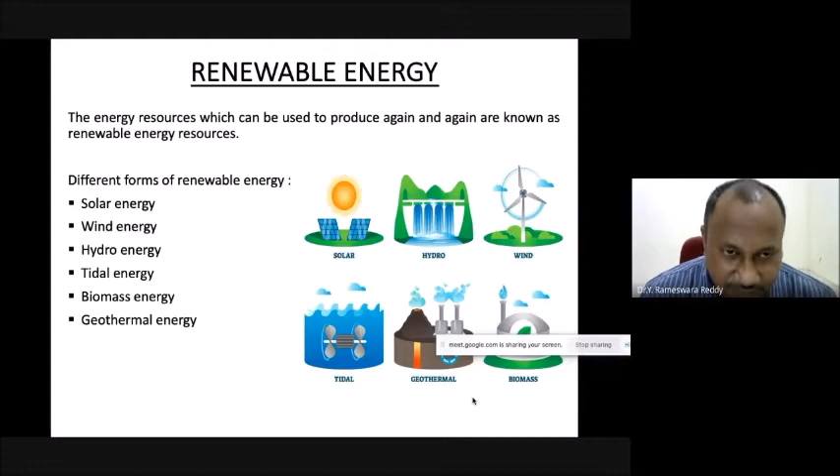Is my presentation visible? No sir. Okay, is the screen coming? It's coming, sir. Okay, now it is visible sir. Okay Rameswara Reddy garu, sorry for the disturbance, I am not conversant with this new system, that's why it got delayed. Fine sir, continue please sir.

Renewable energy sources for industrial applications is my topic for today's presentation. I am Dr. N. Kishore Nath, Scientist G, Project Director with the Advanced Systems Laboratory, DRDO, Hyderabad.

We have done research work on renewable energy for windmill blades made of composites. We developed this around 20 years back through a project called windmill turbine blade development, sponsored by the Ministry of Non-Conventional Energy Sources. With that, I have some association with renewable energy. I will start my presentation.

Energy resources which can be used to produce energy again and again are known as renewable energy sources. Different forms of renewable energy include solar energy, wind energy, hydro energy, tidal energy, biomass energy, and geothermal energy.

Solar energy is widely used nowadays because it is plentifully available. There is no limit for solar energy; how much you can tap depends only on your usage. It is even used for aircraft. We are trying to use solar energy, and already people are flying with solar panels on aircraft, going from one place to another without any issues.

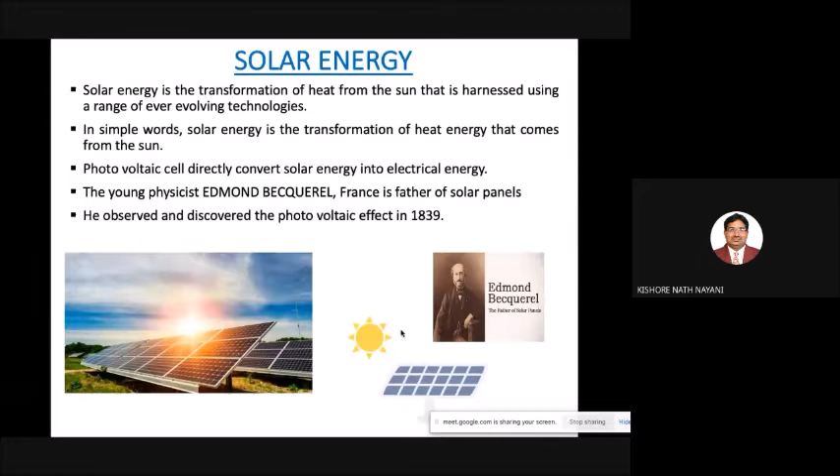Solar energy is the transformation of heat from the sun that is harnessed using a range of ever-evolving technologies. In simple words, solar energy is the transformation of heat energy from the sun into electrical energy. The photovoltaic cell directly converts solar energy into electrical energy and is the main element in this conversion. Edmond Becquerel, the father of solar panels, invented the photovoltaic effect in 1839. Solar thermal panels are used to generate heat energy.

Photovoltaic cells are made from silicon. They turn solar energy directly into electricity. This is the pictorial diagram where we can see a solar panel with silicon positive and negative layers. Once solar energy falls into the photovoltaic cell, it converts into electrical energy.

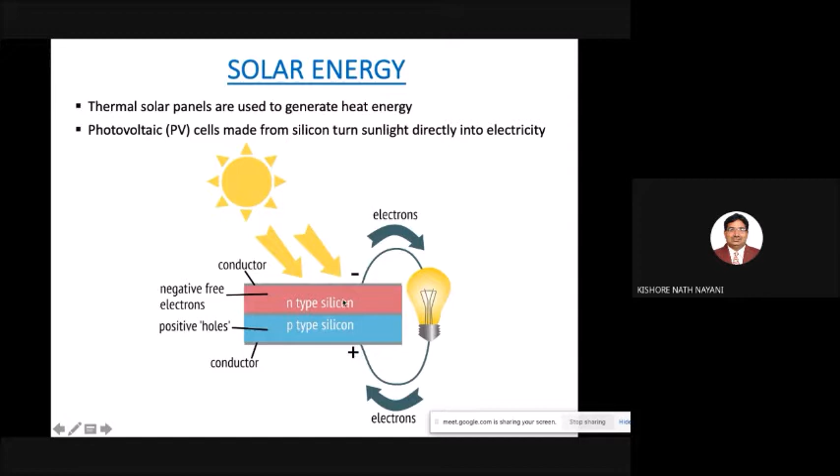Solar panel technology is advancing rapidly with greater efficiency and lower prices, resulting in a huge increase in demand. Initially, photovoltaic cells were very costly, but nowadays, because of government initiatives and more production of photovoltaic elements, the cost is coming down.

However, despite massive advancement in technology, basic solar panel construction hasn't changed much over the years. Most solar panels are still made up of a series of silicon crystalline cells sandwiched between a glass plate and a polymer plastic backsheet, supported with an aluminum frame.

Once installed, solar panels are subjected to severe conditions over the course of their life. Solar photovoltaic cells are made using silicon crystalline wafers, similar to the wafers used to make computer processors. The silicon wafers can be either polycrystalline or monocrystalline. The most efficient type is monocrystalline, manufactured using the well-known Czochralski process.

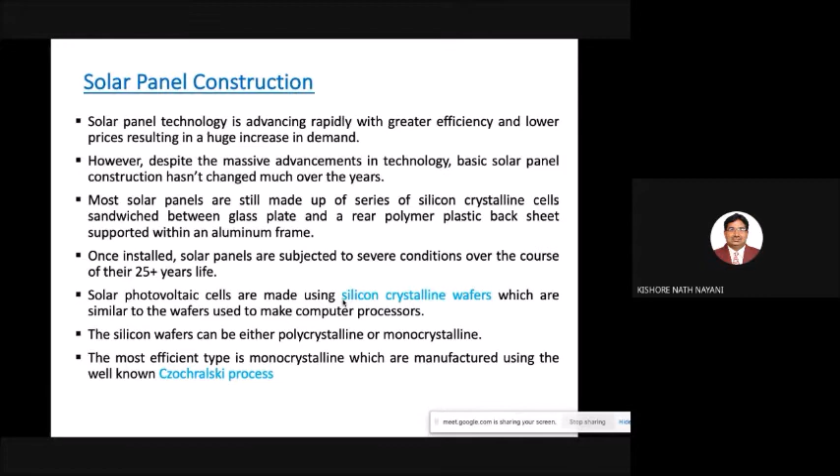This process is more energy intensive compared to polycrystalline, and therefore more expensive to produce. Monocrystalline silicon cells have the highest efficiency and highest cost. Cast mono-silicon cells have high efficiency and lower cost. Polycrystalline silicon cells have lower efficiency and lowest cost.

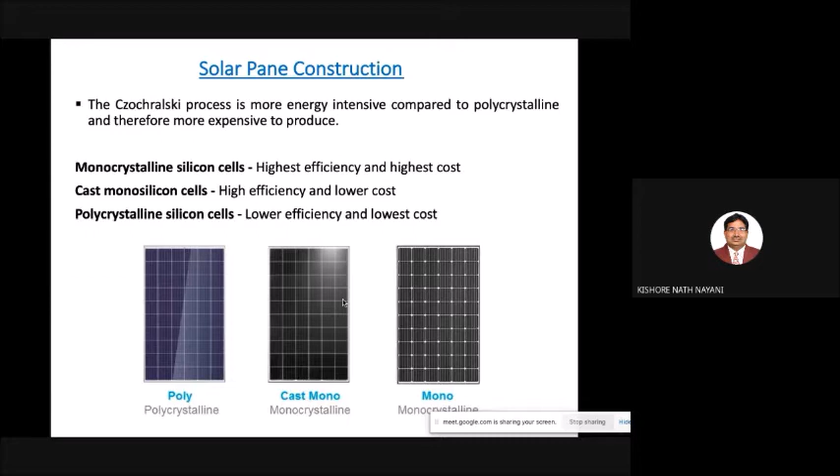For manufacturing crystalline silicon cells, silicon sand is purified in an arc furnace to create 99% pure silicon. This 99% silicon is further refined to close to 100% purity. The silicon is doped with boron or phosphorus, then melted and extracted into a crystalline ingot. The round ingot is diamond wire cut into square wafers. This is the manufacturing process for crystalline silicon cells.

The thin base wafer is coated with an ultra thin layer of either P-type or N-type silicon to form the PN junction, as shown in the figure. Anti-reflective layer and metallic fingers are added to the cell surface, and flat ribbon bus bars or thin wire bus bars are added, as shown in the figure.

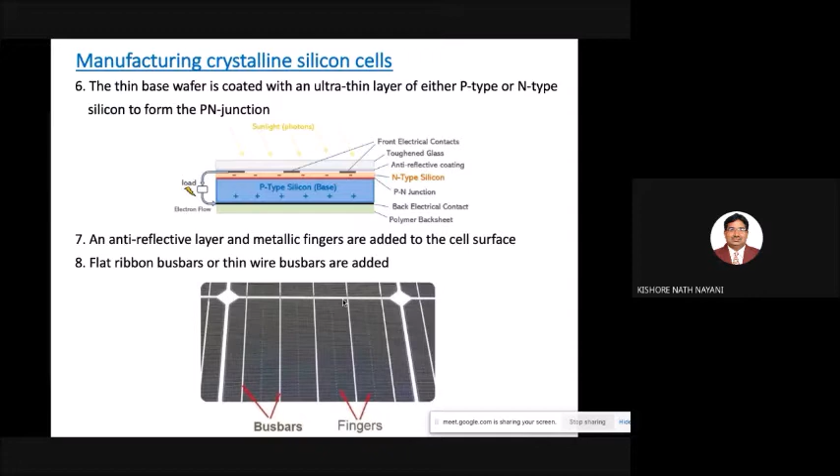In our laboratory called Advanced Research Center, near our DRDO in Hyderabad, there is a lot of research going on in order to remove water droplets or dust falling on the solar panel glass without any effort, so that the efficiency of the solar cells will increase.

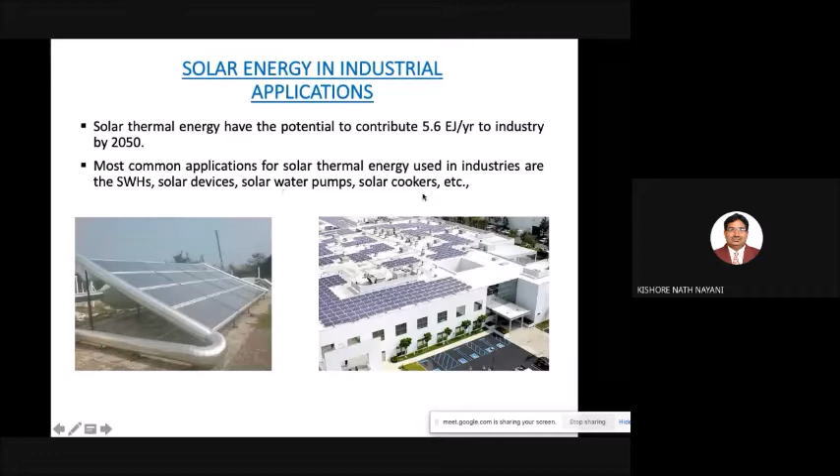Solar thermal energy has the potential to contribute 5.6 exajoules per year to industry by 2050. The most common applications of solar thermal energy used in industries are solar water heaters, solar devices or drives, solar water pumps, solar cookers, etc. I want to tell you, way back in '95 when we completed engineering, we did a project on solar water heaters.

We did that project at JNTU College of Engineering, Anantapur, under the guidance of Durga Prasad sir. I am very happy to tell you that we did some project work way back 25 years ago itself.

If you look at solar panels, most industries are using solar panels to generate their own energy, like Apple, which is a giant in computer devices. They use their own solar energy to meet their own energy requirements. Other companies like Google also use solar energy very efficiently, so that they don't need to depend on the main supply from the states or government. They generate their own energy, and give excess energy to the grid.

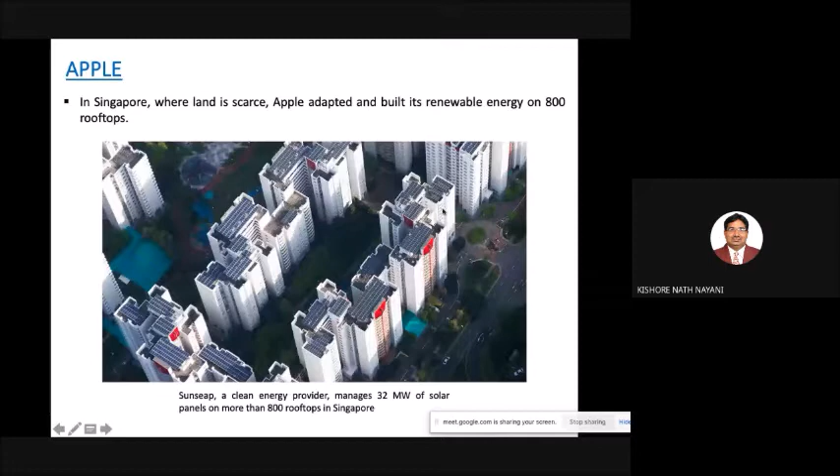Apple uses buildings in Singapore to generate solar power for themselves as well. This is one example.

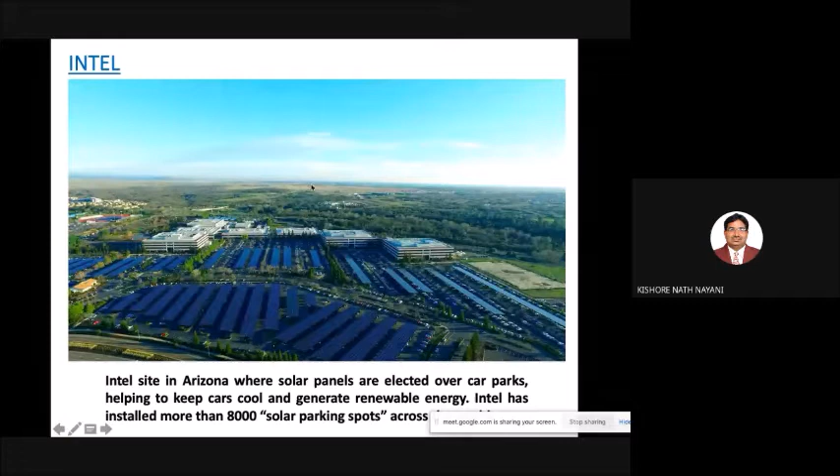In our laboratories also, we are extensively using solar energy. We have planted solar panels on our rooftop and car parking areas, and extensively use them even in our defense usage. Most of the places we are using solar energy.

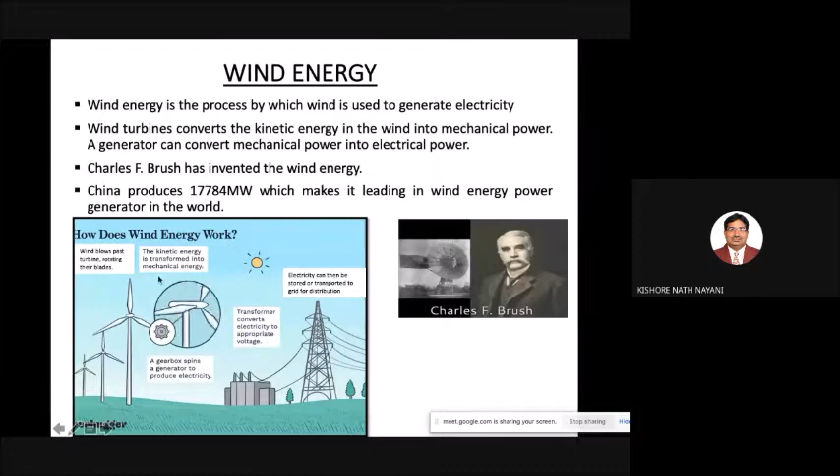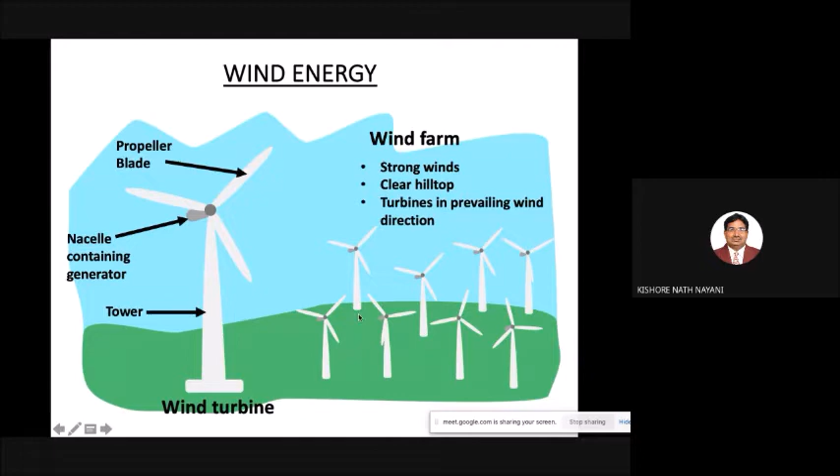The main components of the wind energy mill are the tower, the propeller blade, and the nacelle containing the generator. For a wind farm, we need strong winds, clear hilltops, and turbines in the prevailing wind direction, so wherever the wind is blowing continuously, we can establish the windmill energy.

Wind energy is a free and renewable source. There will be the same supply in future no matter how much is used. It is a source of clean, non-polluting electricity that does not emit pollutants or greenhouse gases. So there is no pollution from wind energy. It's a clean fuel source that does not pollute the air like power plants that rely on coal or natural gas. So there is no pollution and no consumption of resources from nature. These are the two advantages of windmill energy.

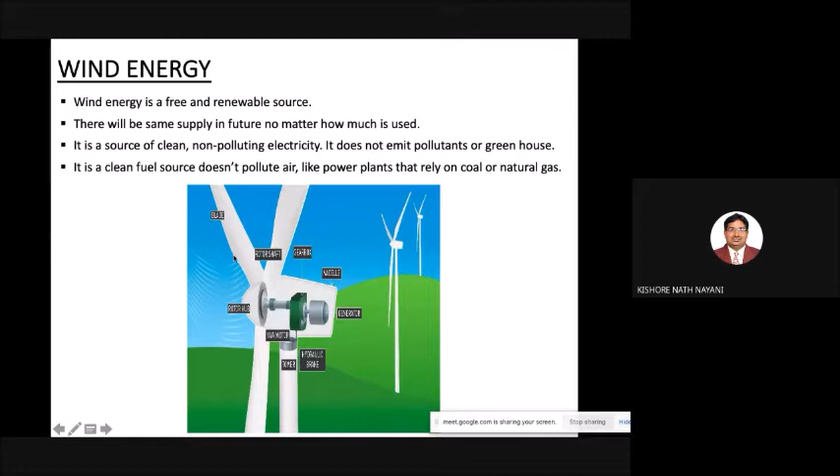Looking at the construction of the blade, since windmill blades are very lengthy and occupy a large diameter, naturally the blade weight has to be controlled. The blade weight has to be as minimum as possible, and it should be aerodynamically shaped. That's why it is made of composite materials.

The cross section of the blade consists essentially of the outer shell, with two outer shells, and in between, for strengthening purposes, we have internal structural support, along with a trailing edge and leading edge. These internal members are also called spars. This is the main construction of the blade.

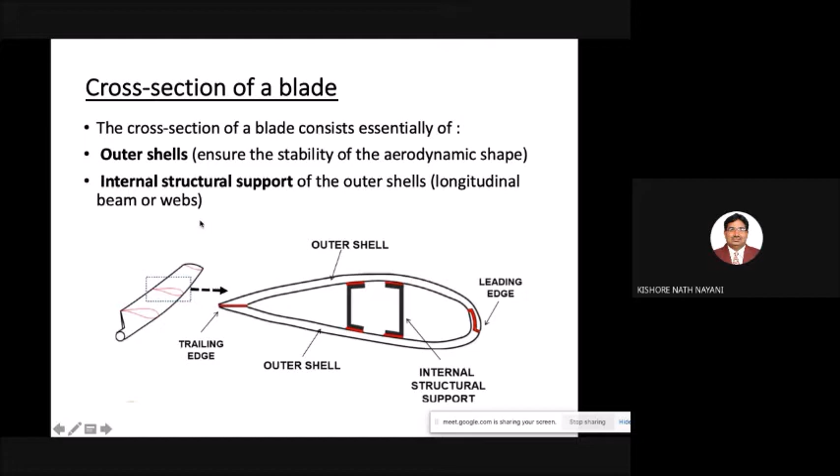There is one more way of making the blade. In order to avoid weight, we can make sandwich panels, with an outer face sheet and inner face sheet, and foam in between, so that we can reduce the weight and increase the stiffness for blade manufacturing purposes.

The main loads are on the blades, which give us flap-wise load and edge-wise load. The aerodynamic shape is like an aerofoil shape. We have to design the blade so that when the wind flows, the blade rotates.

The main loads on the blade are generated by wind and by gravity. Wind loads mainly induce both flapwise and edgewise bending. Gravity loads mainly induce edgewise bending when the blade is horizontal. The rotation of the blade causes alternating edgewise bending, and thus fatigue of the material.

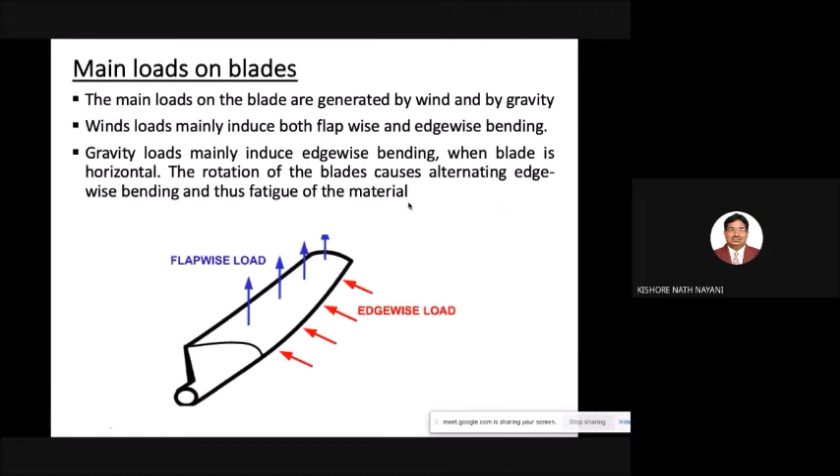The blade will be continuously rotating, that's why fatigue load is also very important to consider in the design. So the key structural design requirements: it must resist the extreme loads and fatigue loads, must be stiff to prevent collision with the tower, and must be as light as possible. That's why we make windmill blades with composite material like e-glass fiber and polyester resins.

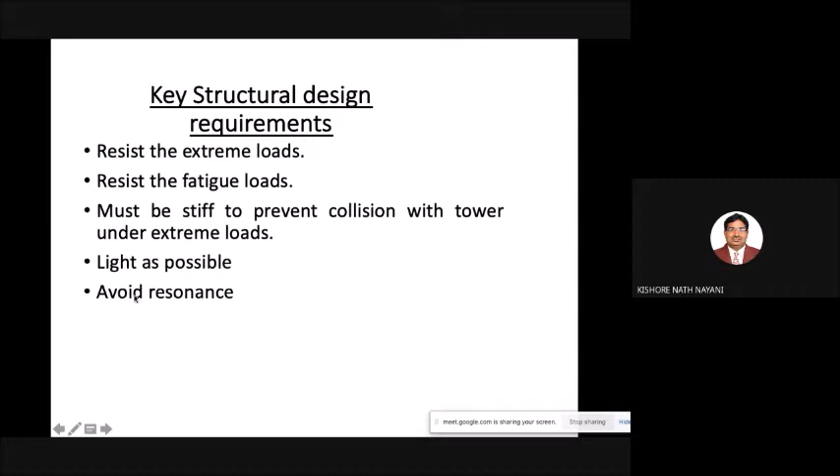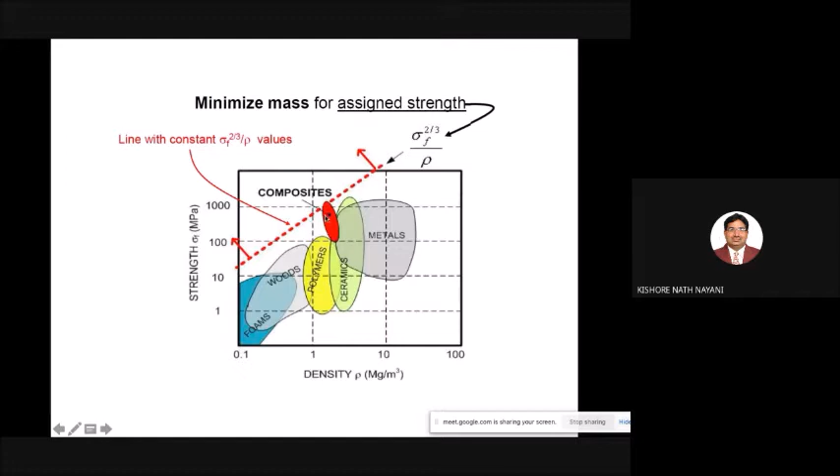Then it avoids resonance, which is also one of the important parameters we have to consider during the design. If you see the graph, composites have more strength and less density, so that makes them a candidate material for manufacture of the blades. In terms of stiffness also, composites will meet the requirement.

If you see the construction of the material, there is a top skin and bottom skin made of composites with different layers, like 0 degree, 90 degree, plus minus 45 degree, depending upon the design. We have to choose the layer lamina sequence.

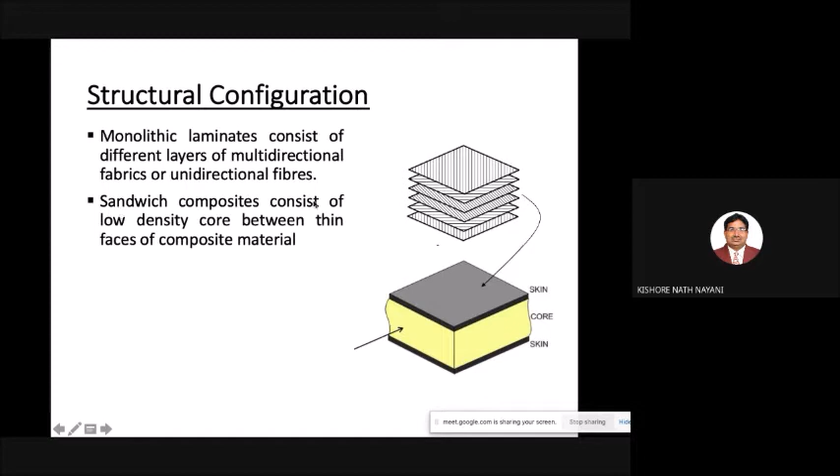Between the top skin and bottom skin we use a core, like a honeycomb core or a foam core. Monolithic laminates consist of different layers of multi-directional or unidirectional fabric, and a sandwich composite consists of a low density core between thin faces of composite material.

If you use sandwich composites, when load is applied, the outer fiber takes the tension and the inner fiber takes the compression load. If the main thickness of the skin is T, the foam should be 2T, so the total thickness becomes 4T. The insertion of core increases the thickness of the structure and thus the flexural stiffness and strength without increasing its weight. This is how sandwich construction is made for manufacturing the blade.

In the manufacturing process of the blade, there are various techniques, but we used the wet hand lay-up technique for realization of a 20-meter long blade with 1.5-meter width in our laboratory long back. Other techniques include vacuum infusion, pre-preg, resin infusion, wet hand lay-up, filament winding, and blade infusion.

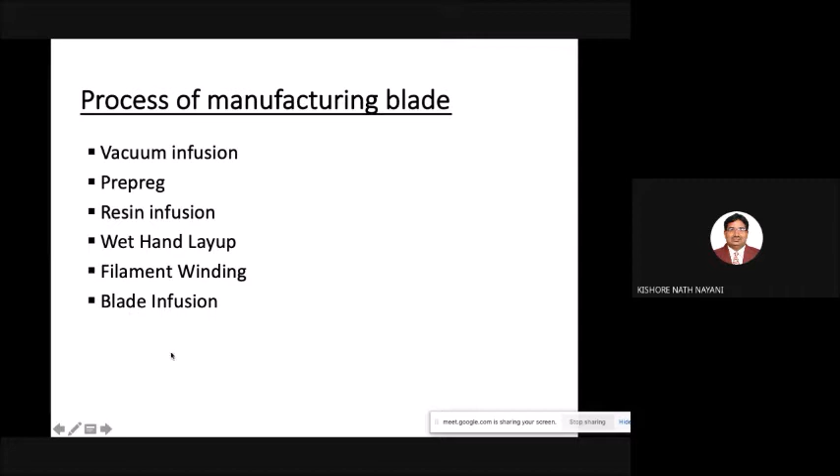Nowadays vacuum infusion technique is mostly used by industries. In pre-preg technology, there is industrial impregnation of fiber, then forming the impregnated fiber into a complex shape. This technology gives a higher production rate. We make the pre-preg in an impregnation plant, and finally use the pre-preg for realization of the blade, as shown in this schematic diagram.

On the mold surface, we use a release film, then pre-preg, core, pre-preg, then peel ply to get a better texture, then breather and vacuum bag. It consists of fiber impregnated with resin that is not fully cured, called the B stage.

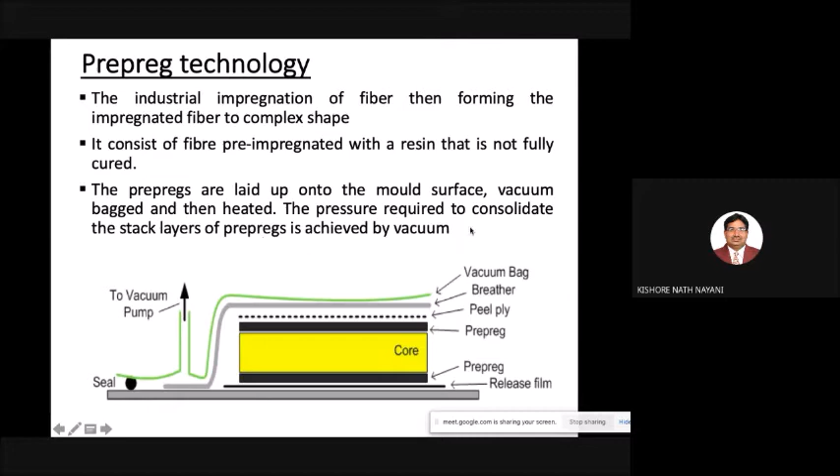This is resin infusion technology. Nowadays most industries use resin infusion technology because it takes less time to manufacture a blade - even in one day, one blade can be manufactured. Fibers are placed in a closed sealed mold and resin is injected into the mold cavity under pressure. After the resin fills all the volume between the fibers, the component is cured with heat.

First on the mold you have to apply release agent and then put the fiber, and the resin is transferred through vacuum to the entire surface of the fiber. After the entire fiber is wet, then the vacuum bagging is done and the mold is heated so that you can realize the blade.

So there are various types of resin infusion technologies and resin transfer molding techniques. You can use pressure to transfer the resin into the fabric - that is called resin injection under pressure higher than atmospheric. There is another technique called vacuum assisted resin transfer molding, which is resin injection under vacuum or pressure lower than atmospheric.

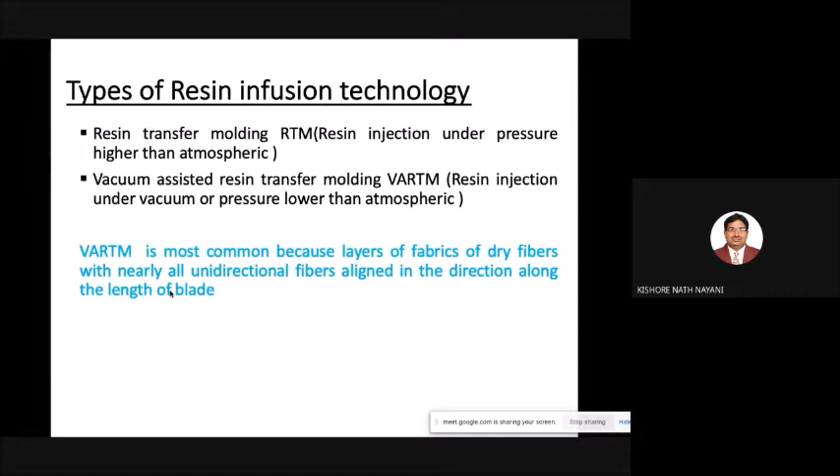VARTM is the most common technique used because layers of fabrics of dry fiber with nearly all unidirectional fibers are aligned along the length of the blade. Vacuum assisted resin transfer molding is the proven technique for realization of these blades because various materials have been developed to impregnate the fabric uniformly, and it's continuously used because it's a very fast technique - we can realize any very big blade, even one blade per day.

This is another important technique used in the initial days of development, called the wet layup technique. Dry fiber materials like mat, fabric, or unidirectional tapes are laid in various layers into the mold of the component, then impregnated with resin and cured at room temperature. Or if you use high temperature resin systems, you have to heat either in an oven or by using a heater arrangement in the tool itself to realize the blade.

This is capital intensive machinery. Once the machinery is established and the techniques are established, we can produce blades at a very faster rate, and very accurately all the fibers can be aligned so that the thicknesses can be reduced. We can make efficient blades.

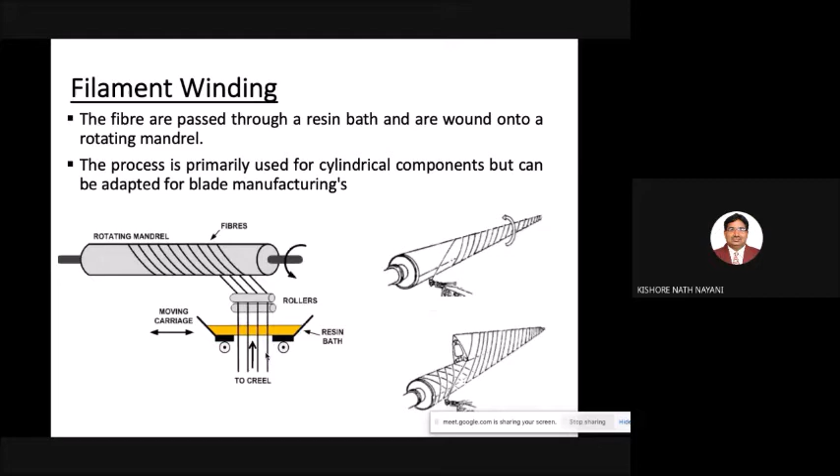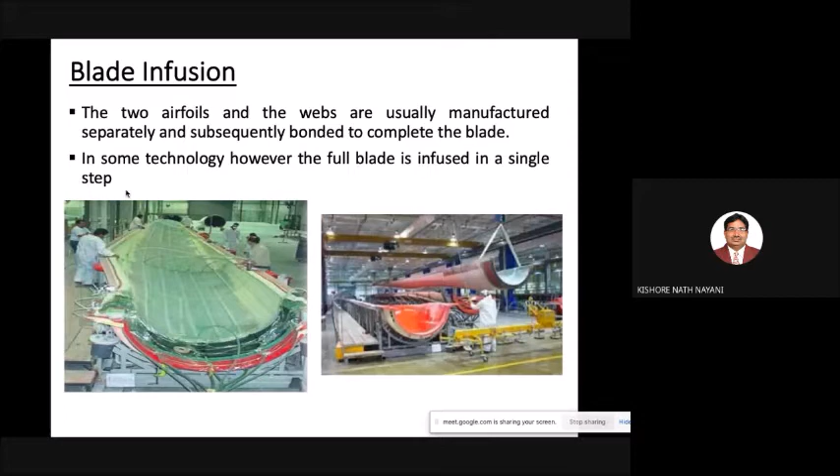In composites, there are various types of defects that can occur, and we have to avoid defects in order to make the blade without any defects. Voids and dry zones, delamination, bonding defects, foreign inclusions, fiber waviness, wrinkles - these are the common defects which come up in the manufacturing of the blade.

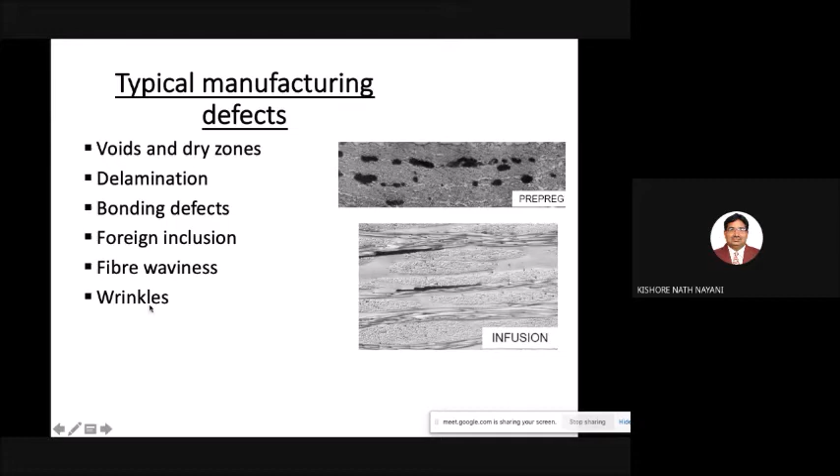There are various fibers used in the realization of these blades, called glass fiber, carbon fiber, aramid fiber, basalt fiber, then hybrid composites. In some places we can use combinations of these fibers, then natural fibers. Another important element is called the matrix, that is the resin system - we can use polyester resin, vinyl ester resin, epoxy resin.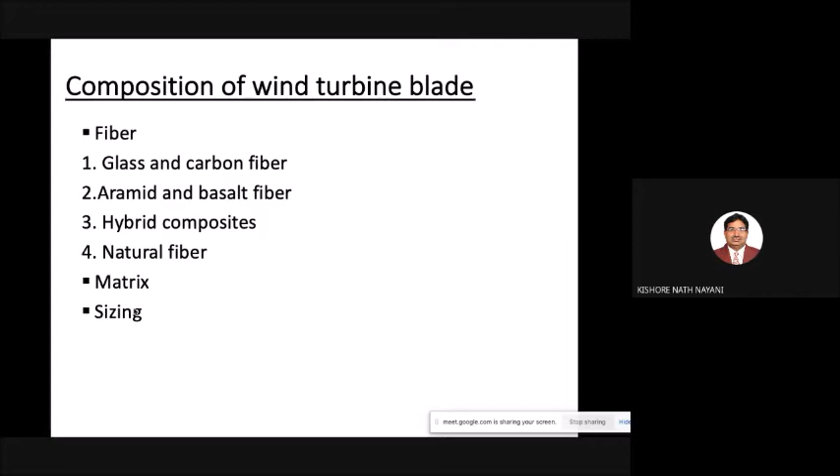Then the fabrics we are using should be sized in order to have compatibility with the resin system - like for epoxy resins, we give silane coating. For carbon fabric, other types of coatings are given in order to have a good bond between the resin and the fiber. Glass fiber is mostly used because it is readily available and has good strength, used as the main reinforcement material in composites, and with increasing volume content in fiber, stiffness, tensile strength, and compressive strength increases. Then S-glass fiber also has good strength, so it is also used in some applications.

S-glass fiber has 40% higher tensile and flexural strength, 10 to 20% higher compressive strength and flexural modulus compared to E-glass, but S-glass is much more expensive than E-glass.

Carbon fiber is very costly and generally not used, but in some specific applications where you want lightweight, high stiffness, and low density, thinner, stiffer, and lighter blades can be made using carbon fiber. However, it has low damage tolerance, compressive strength and ultimate strain, and is sensitive to fiber misalignment and waviness. So carbon fibers must be used very carefully because they are costly, and we have to place the fiber accurately into the mold.

If you see the stress strain graph of different fibers, high strength carbon fiber has high tensile stress, then Kevlar, then S-glass and E-glass. Resin will have a high strain rate. So when you make the combination, depending upon the volume fraction, we can realize the composite blade.

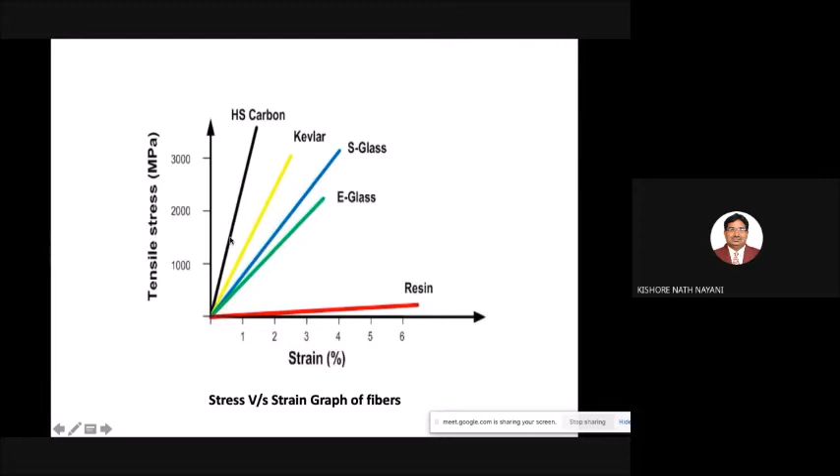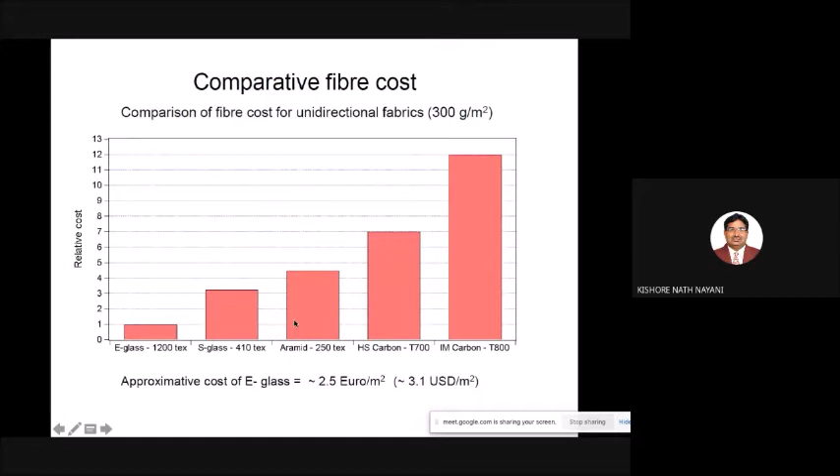Cost-wise, carbon is very costly compared to glass. Glass is very low, then S-glass, then aramid, then intermediate modulus and high strength carbon fabric. In terms of strength levels, carbon fiber has very high tensile strength compared to other materials, as high as 5,300. E-glass will have mostly half of that strength. Density-wise, carbon has less density compared to glass. Aramid is still lighter, but aramid has issues like moisture sensitivity and other problems, and availability is also a question mark.

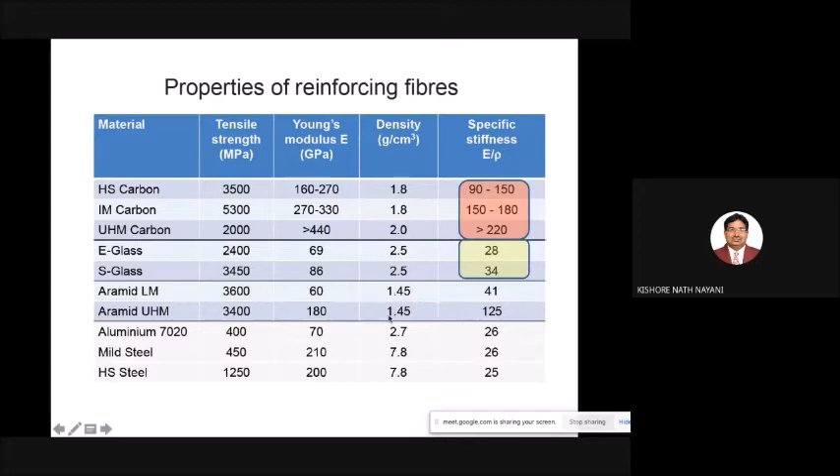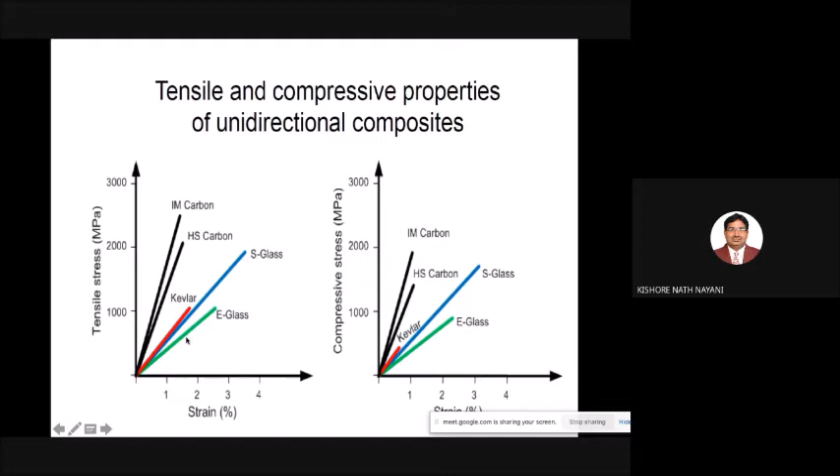Then tensile and compressive properties of unidirectional composites, as shown in the figure, tensile stress and compressive stress when compared to the other composite materials.

The main failure modes in composite materials, composite laminates, are fiber failure, matrix failure, fiber matrix debonding, interlaminar failure called delamination, and buckling instability. For composite sandwich cores, failure includes core to face sheet debonding. These are the common failure modes that occur in composite materials.

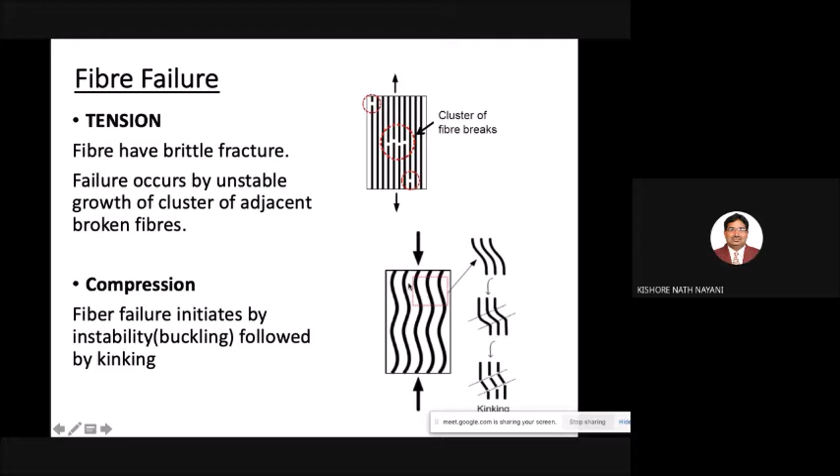For fiber failure, in tension you can see how the fiber breaks. If the fiber breaks in between, it will not take the desired load. Fiber has a brittle fracture, and failure occurs by unstable growth of a cluster of adjacent broken fibers. Under compressive load, fiber can also fail in compression, initiating by instability, buckling, followed by kinking. If the fiber is not straight and has different shapes, it will fail in compression, so we need to ensure that the fiber is placed appropriately.

Matrix failure is controlled by tensile or compressive stresses perpendicular to the fiber and by shear stresses. Tensile loading involves failure of matrix perpendicular to the tensile load direction, while compressive loading involves failure of matrix along the inclined plane. These diagrams show how it breaks in tensile mode and compressive mode.

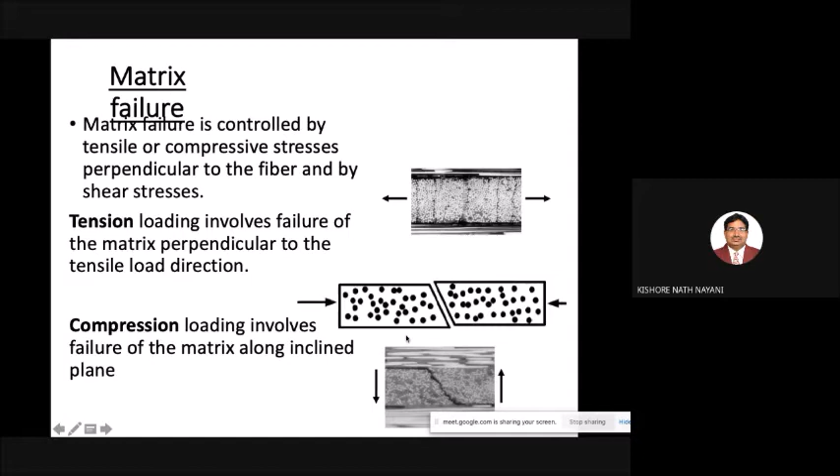What are the different types of tests we have to carry out after realization of the windmill blade? We have carried out structural tests of a long blade, 20-meter blade, using some structural test fixtures in our laboratory, and we have qualified the blade. The deflections were as high as 100 mm from the tip of the blade to the main connecting member.

Wind turbine blade testing solutions are engineered to address the complete range of full-scale structural, static and fatigue test requirements used for both static and fatigue load blade evaluations. These are scalable solutions designed to expand with our ever-evolving needs. Test blades are up to 100 meters in length.

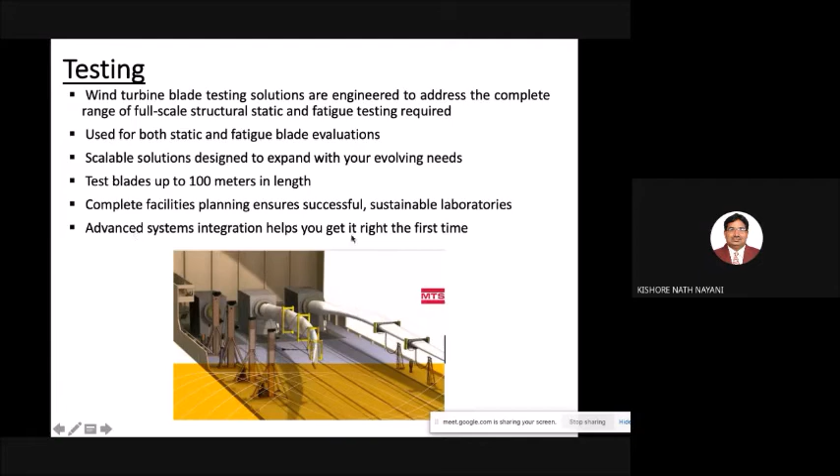At that point of time we developed 20-meter length blades, but now blades are made as high as 100 meters in length also. Complete facilities for planning ensure successful and sustainable laboratories. Advanced systems integration helps you get the right product the first time.

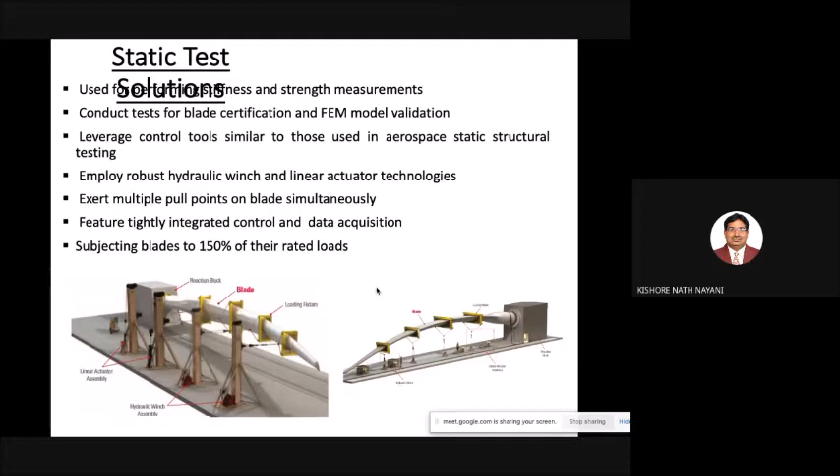These are the different testing conditions or loading conditions. We have to apply side loads, bending moment, tensile, and compressive loads. We use different types of fixtures and apply the load as per the designer's requirement, and see that the blade withstands all the conditions of the working environment loads. There are different types of actuators we can use, testing by using a winch assembly or a linear actuator assembly to apply the loads. These are the different fatigue test conditions.

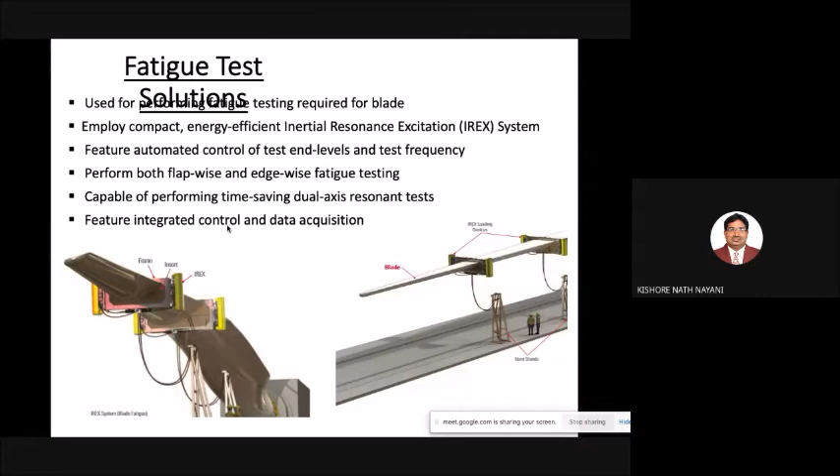Also we have to do the load tests, in order to see the life of the blade, how many hours it can use. So we have to conduct the fatigue load conditions also. There are various types of test laboratories which can conduct these tests, and we can qualify the blade. You can see this is one of the different test photographs shown here. These are the data which I have collected from the internet only. We have also done some tests, but I don't have the figures, though we have completely qualified the blade for different loading conditions like tensile load, fatigue load, compressive load, bending moment, and other functional loads.

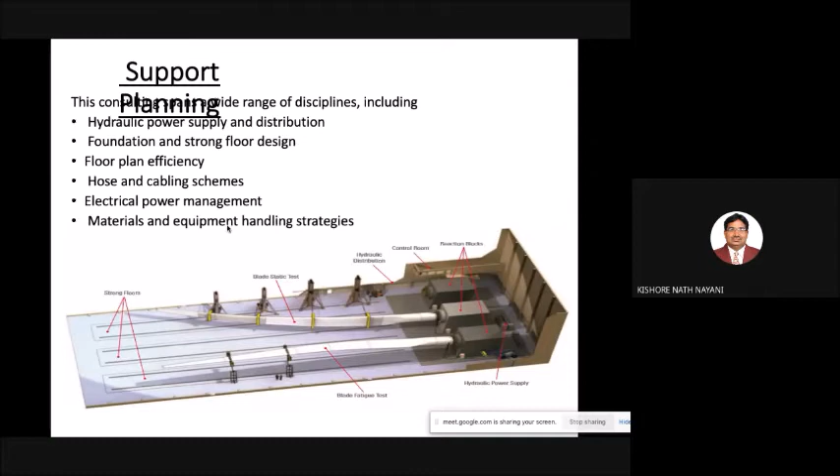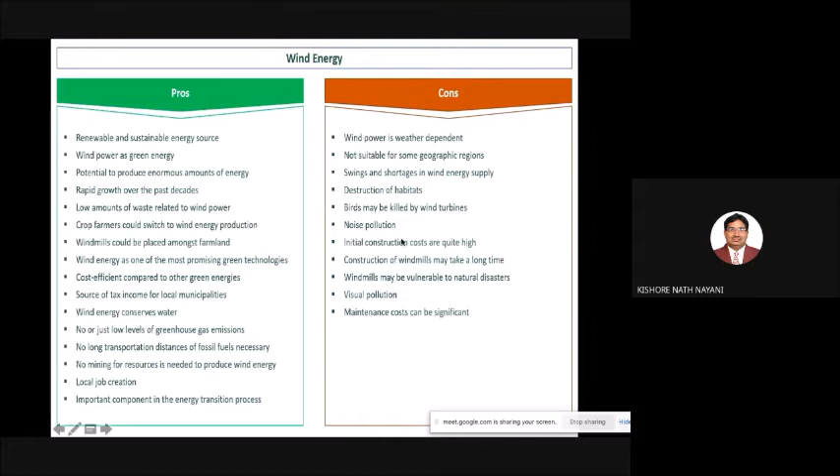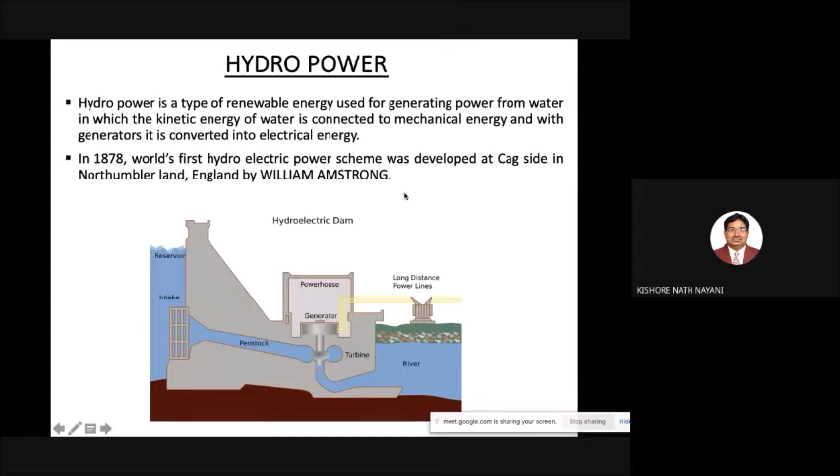Hydropower is the type of renewable energy used for generating power from water, in which kinetic energy of water is converted to mechanical energy, and with generators it is converted into electrical energy. You can see this is the reservoir where water is transferred to the turbine through penstocks, and the turbine rotates and power is generated. This is a very old form of renewable energy, and in India we use it extensively wherever plenty of water is available and stored through the construction of dams. So this is the diagram, you can see how the water is flowing and the turbine is rotating, and power is getting generated.

Hydropower system converts kinetic energy of flowing water into electrical energy. Flowing water turns the propeller called a turbine, and the turbine turns the metal shaft of an electrical generator, which produces electrical energy. Hydropower is known to everybody, so I am not going into deep details.

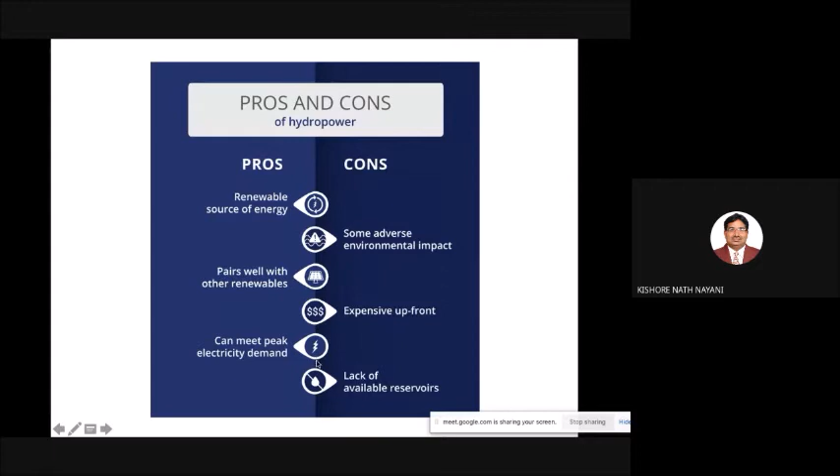These are the pros and cons of hydropower. It is a renewable source of energy, pairs well with other renewables, and can meet peak electricity demand. However, there are some adverse environmental impacts, and it is expensive upfront because the construction of a dam is very expensive and takes decades to build. Then there is also a lack of available reservoirs.

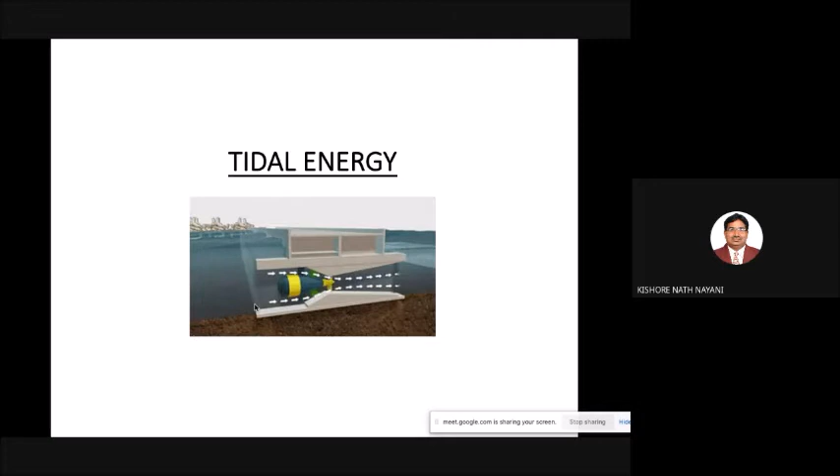Another important form of energy people are harnessing nowadays is called tidal energy, where you can use tides in the ocean to generate electricity. This is one form of new technology development. Tidal energy is being used because of advancements in technology. We can harness these ocean tides into making energy. It is a form of hydropower that can convert energy from tides into a useful form of power.

Tidal energy plants are relatively high cost and limited to sites with high tidal ranges or flow velocities. Tides are more predictable than wind and sun. Some of the main tidal energy plants are situated in South Korea, France, and United Kingdom. Here you can see schematically, when the tides are coming, the blade will rotate and it will generate electricity. Research is going on to improve how to harness this energy.

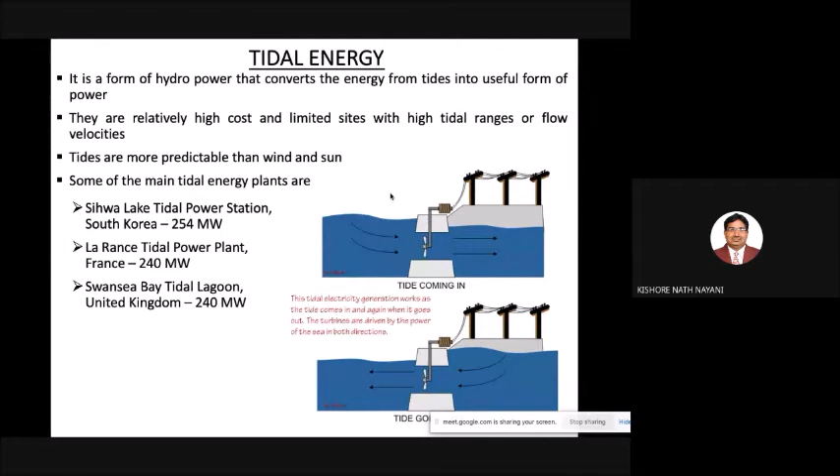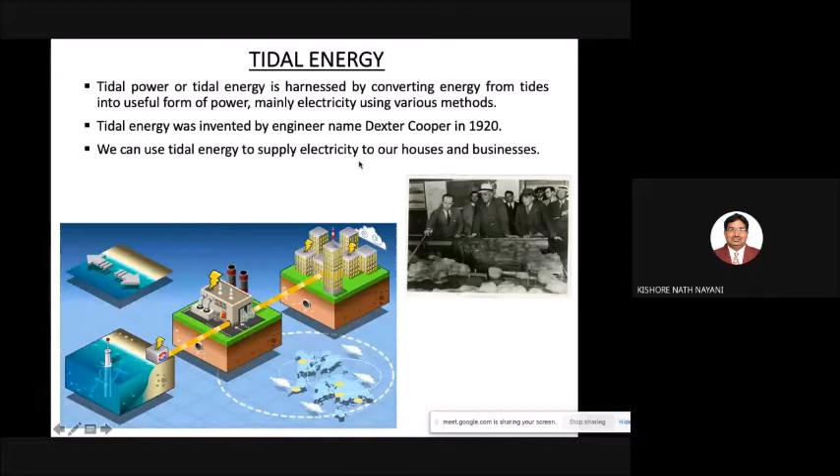The tides which are generally in the ocean come regularly, so we can harness this energy, but initial investment and other things are very important. Tidal power or tidal energy is harnessed by converting energy from tides into a useful form of power, mainly electricity, using various methods. Tidal energy was invented by an engineer named Dexter Cooper in 1920. We can use tidal energy to supply electricity to our houses and for business purposes.

Tidal barrages can be used to harness tidal energy. They make use of the potential energy in the difference in height, or hydraulic head, between high and low tides. When using tidal barrages to generate power, the potential energy from the tide is seized through the strategic placement of specialized dams.

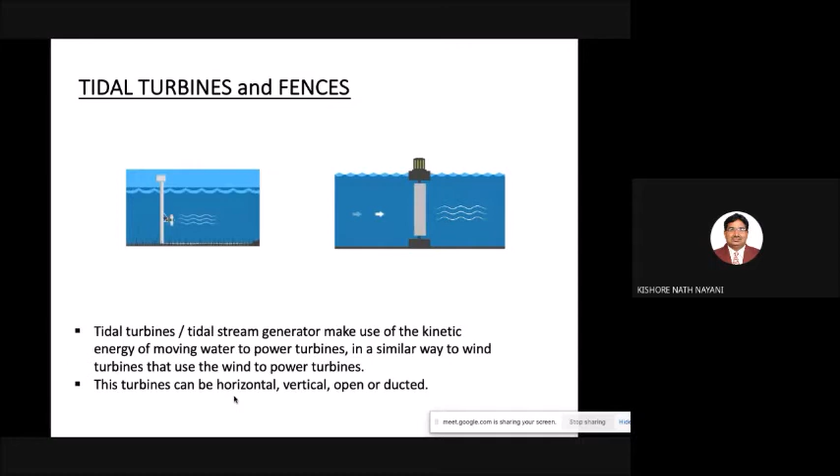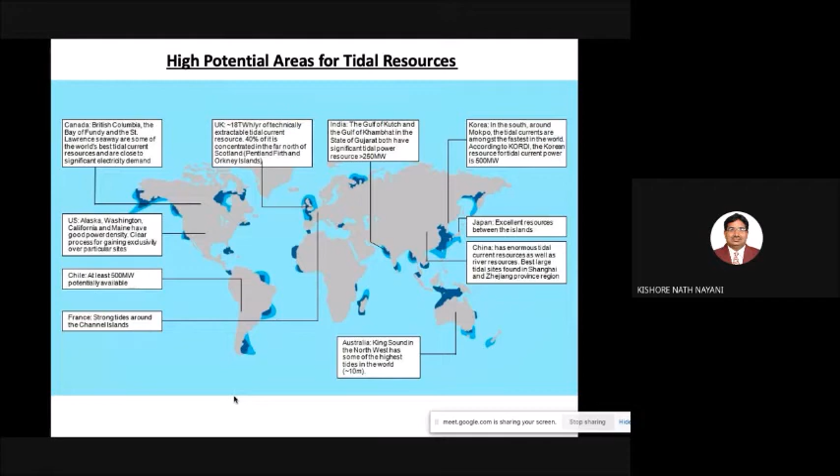These are the different types of turbines we can use to harness the tides and generate electricity. These are the potential areas where tidal energy can be harnessed, as shown on the internet, and the same thing is produced here.

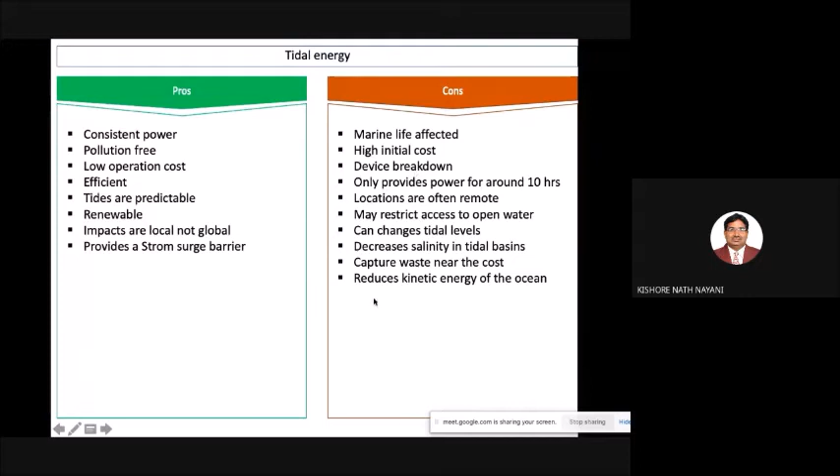Various advantages and disadvantages of tidal energy: consistent power, pollution free, low operation cost, efficient, tides are predictable, renewable, impacts are local, provides storm surge barrier. The disadvantages are marine life is affected and high initial cost. Also, the technology is still maturing to use tidal energy completely.

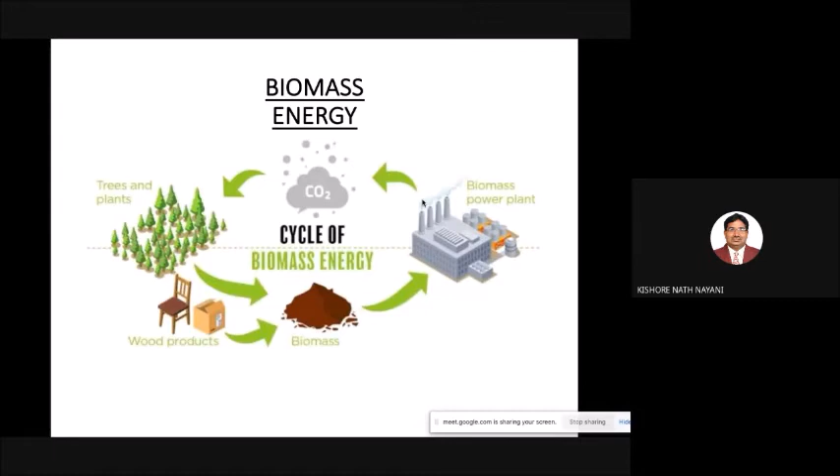Biomass energy is another renewable resource which can be harnessed for generating renewable energy. Biomass is an organic material that comes from plants and animals. Biomass contains stored energy from the sun. Plants absorb sun energy through a process called photosynthesis. When biomass is burned, the chemical energy in biomass is released as heat.

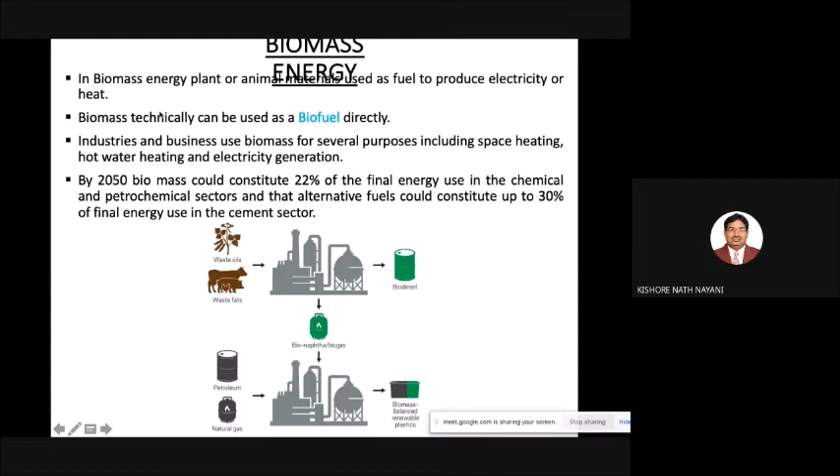In most villages, biomass energy plants are made to harness biomass, which is plentiful in villages through animal waste and other resources from the environment and forest. We can use whatever resources are available, and from that, gas is generated and converted into electricity. These are the layout of the biogas process, where we can use forest residues, recycled wood, and impregnated wood, which can be converted into biogas.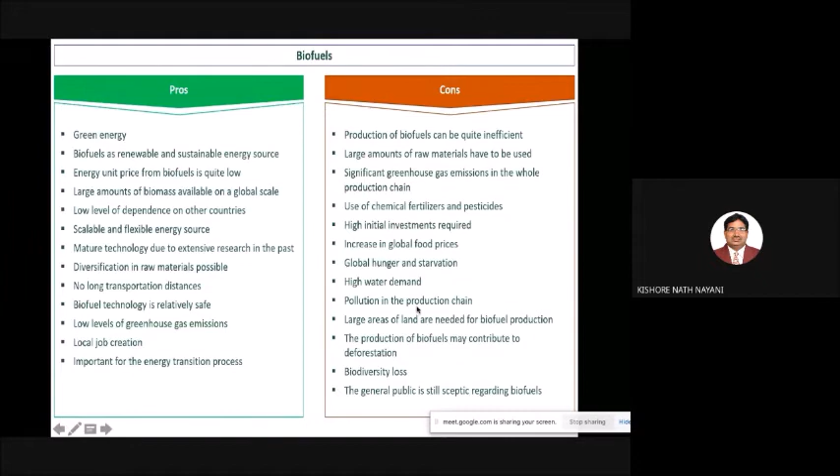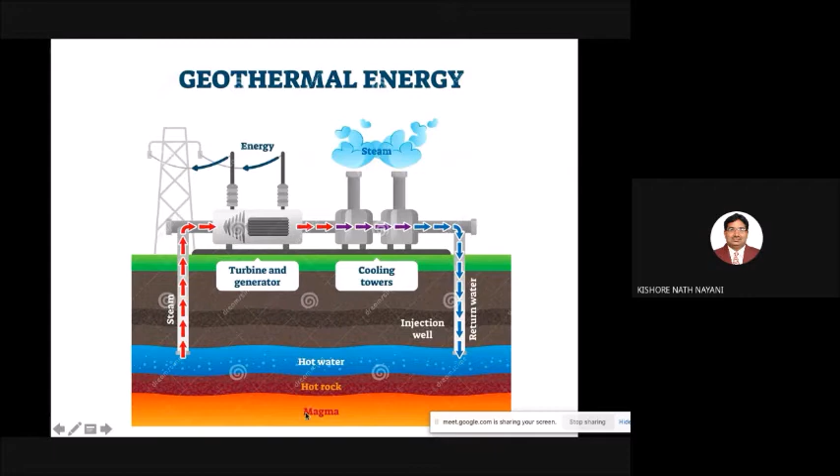Another important form of renewable energy source is geothermal energy. Here we can use gases produced in the earth by tapping the geothermal energy. We can generate electricity using turbines and cooling towers. We have to find out where geothermal energy is available, and from there we can generate this energy for different purposes.

Geothermal energy is a type of renewable energy taken from the Earth's core. It comes from heat generated during the original formation of the planet and the radioactive decay of materials. It was first invented in 1904 by Prince Pio Ginori Conti, who invented the first geothermal power plant at the Larderello dry steam field in Italy.

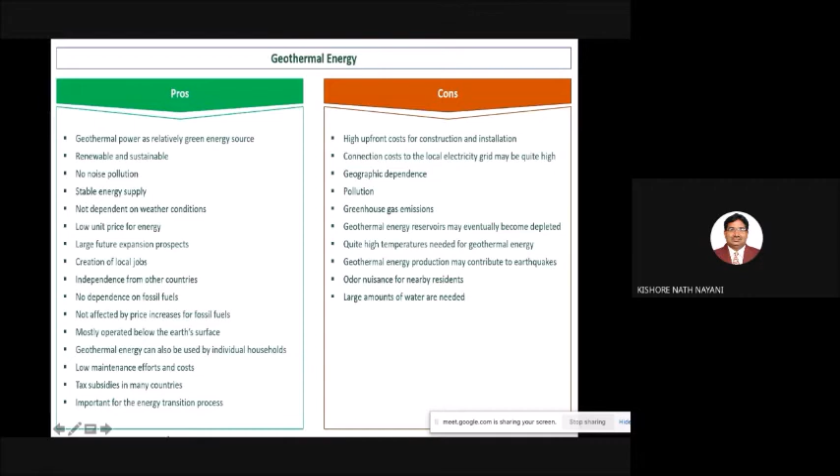Resources of geothermal energy range from shallow ground to hot water and hot rock. The United States is the largest producer of geothermal energy, around 17,415 megawatts. These are the advantages and disadvantages of geothermal energy. We have to find out where the resource is available, tap the resource, and then we can generate power using geothermal energy.

So in India, what renewable energy are we using? India is the world's third largest consumer of electricity and the world's third largest renewable energy producer, at 38%, or 136 gigawatts out of 373 gigawatts of total installed energy capacity for the year 2020. As of September 2020, 89.22 gigawatts of solar energy is already operational. Projects of 48.21 gigawatts are at various stages of implementation, and projects of 25.64 gigawatts capacity are under various stages of bidding. Most states are now depending on these investments.

So states are going into solar energy and renewable energies of different sources, as I explained, like windmill energy, biomass energy, and geothermal energy.

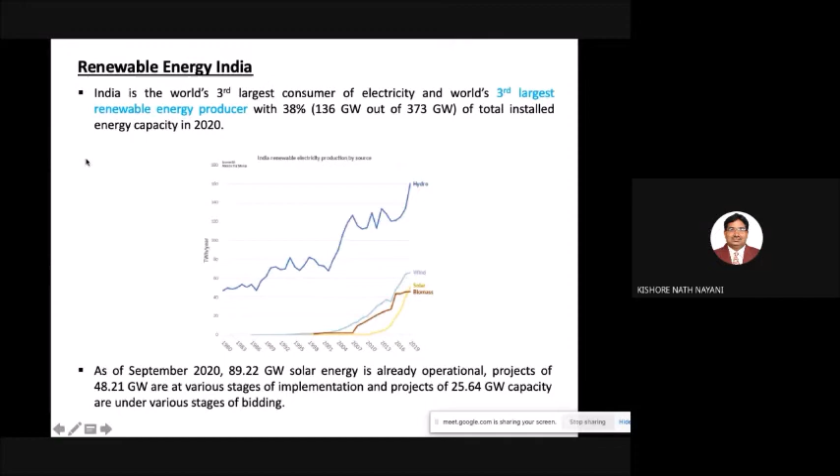So in defense also we are using solar energy wherever possible. We have installed solar power plants in many places wherever land is available, and we are using them heavily.

Wind energy in India has a strong manufacturing base with 20 manufacturers of 53 different wind turbine models of international quality, up to 3 megawatts in size, with exports to Europe, United States, and other countries. Windmill energy requires strong windmill blades, and those manufacturing plants are available plenty in India.

We initially developed the technology for manufacturing using the hand lay-up technique. Now a lot of industries like Suzlon and LMW are manufacturing blades of very high length, as high as around 50 to 100 meters.

Denmark is the main country producing most of the windmill blades, which are supplied globally to all other countries. India is also gearing up to meet the world's requirement of these windmill energy blades.

Windmill energy - nowadays people are thinking even on the ocean surface a lot of wind is blowing, so how to tap this energy by installing windmill blades in the ocean. A lot of research is going on so that we can tap most of this renewable energy source from windmill blades.

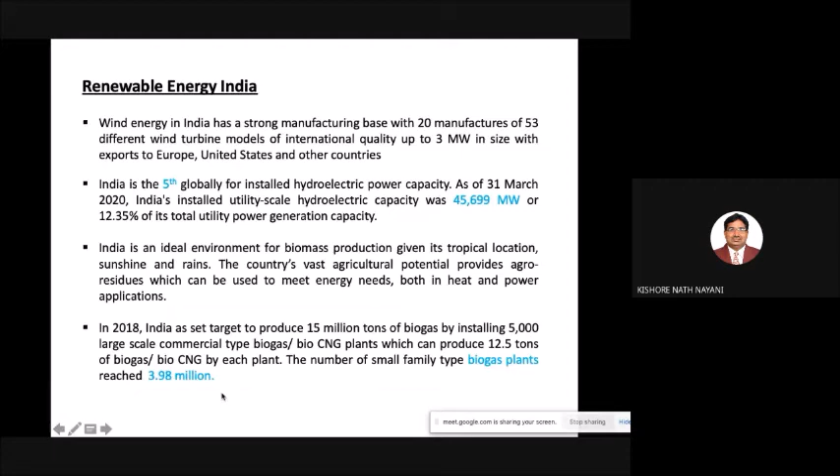Renewable energy in India - Tamil Nadu has the advantage of wind blowing continuously throughout the year. That's why most windmill blades are installed in Tamil Nadu, Maharashtra, and some parts of Andhra Pradesh. The development of wind power in India began in the 1990s and has significantly increased over the last few years.

As of 30 June 2018, the installed capacity of wind power in India is around 34,293 megawatts, or 10% of India's total installed power capacity, mainly spread across Tamil Nadu, Maharashtra, Gujarat, Rajasthan, Karnataka, Andhra Pradesh and Madhya Pradesh.

In my native place in Anantapur also, there are a lot of windmill blades near Tadipatri, where there is continuous wind blowing. Suzlon also has put up windmill blades near that area.

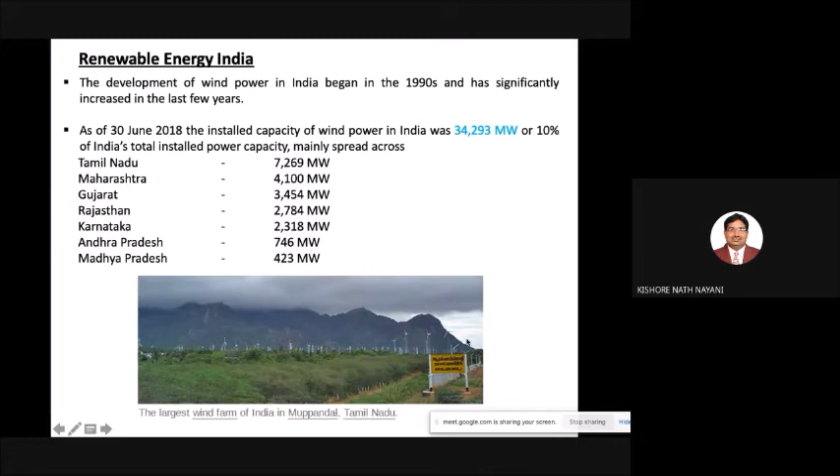India has set an ambitious target to generate 60,000 megawatts of electricity from wind power by 2022. The government's Ministry of New and Renewable Energy announced a new wind-solar hybrid policy in May 2018, meaning the same land will be used to house both wind farms and solar panels.

Compared to solar energy, there is also a large floating solar power plant in India. It recently came in newspapers - in Visakhapatnam, the Government of India has established a large solar power floating project. NTPC started operations on India's largest floating solar PV project at Visakhapatnam, known as the Simhadri floating solar PV project, with a capacity of 25 megawatts.

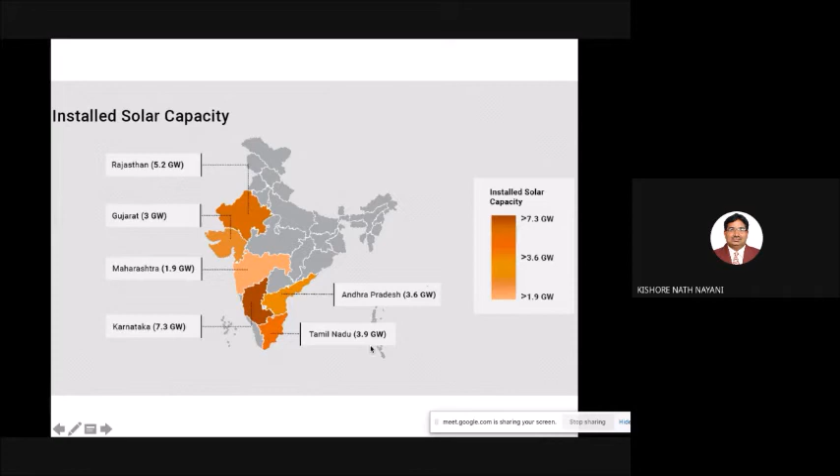There are cities identified as solar cities in India, and the government is giving a lot of encouragement in order to generate solar power.

Recently I visited Cochin for some official work. There I came to know that the entire airport power is harnessed from solar. The complete renewable energy is used for airport operations and maintenance, and lighting in the airport, even air conditioners, everything is run by solar power. So that is one good sign that we are using solar power efficiently in many places.

These are the companies which are working for renewable energy sources in various domains like solar, windmill, and other applications also.

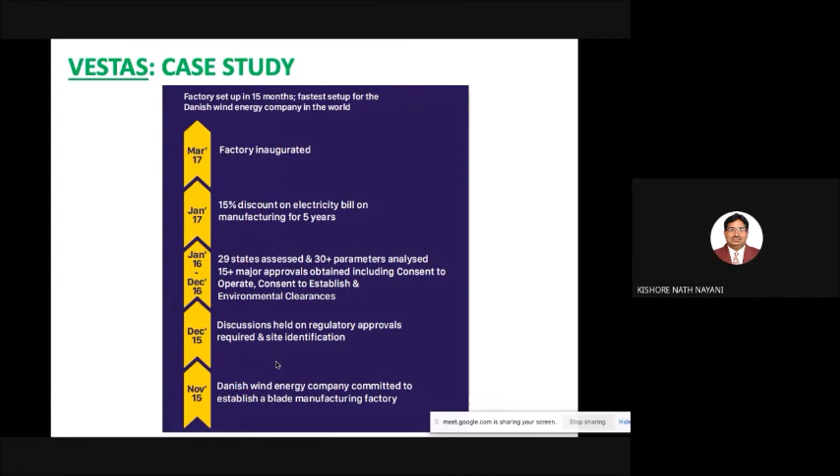If you see windmill energy, how much time will it take? It takes almost 2 years to establish a blade manufacturing company in order to produce the blades.

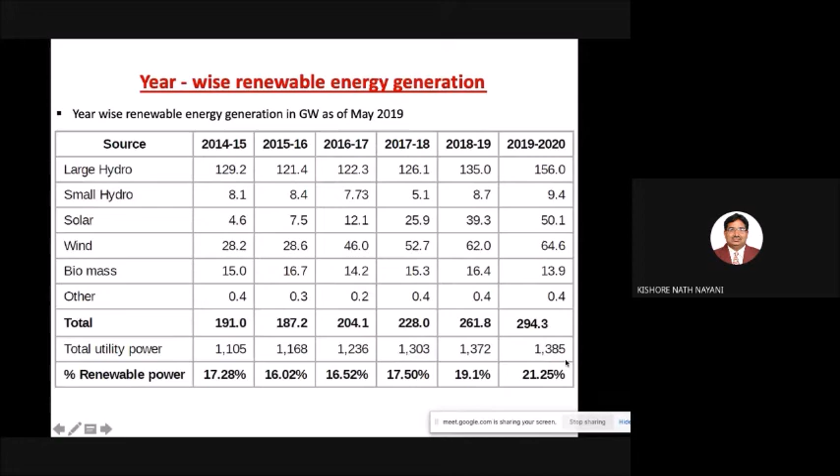So if you can increase this to 50%, then our normal fossil fuels, diesel, or nuclear power we can reduce, and the pollution also we can reduce. So that renewable energy sources we can harness completely, so that it is available in plenty and there is no dearth for the renewable energy sources.

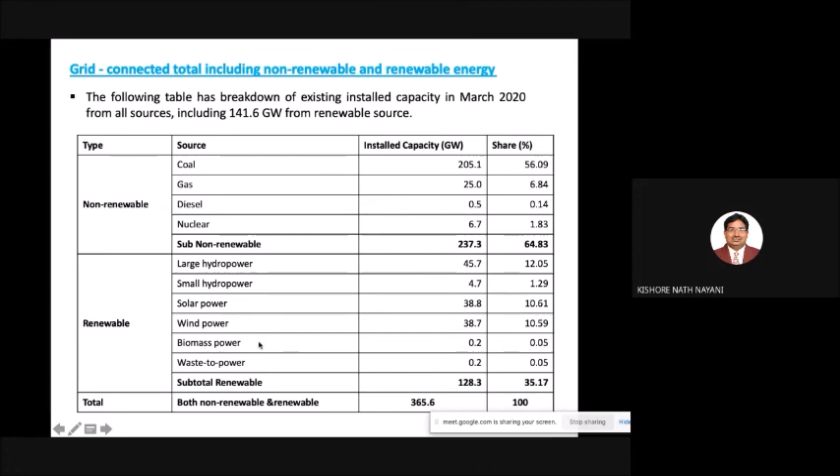If you go after 20 to 30 years, we may end up with coal or diesel running out. But renewable energies are available in plenty. We have to harness renewable energies in order to meet future requirements.

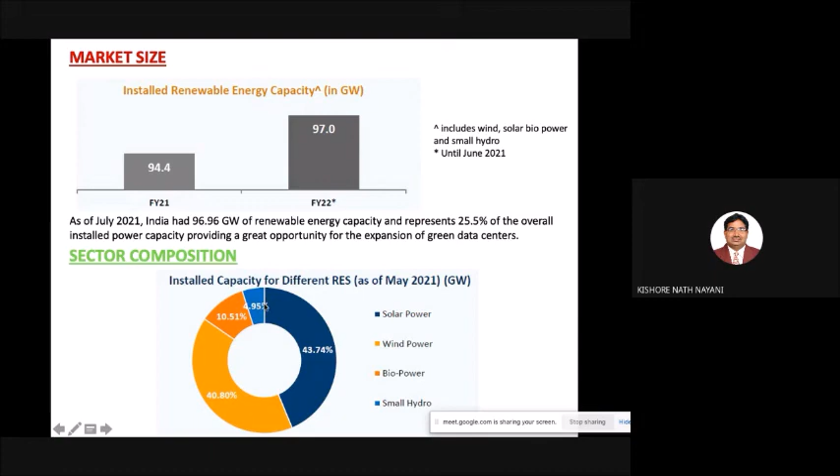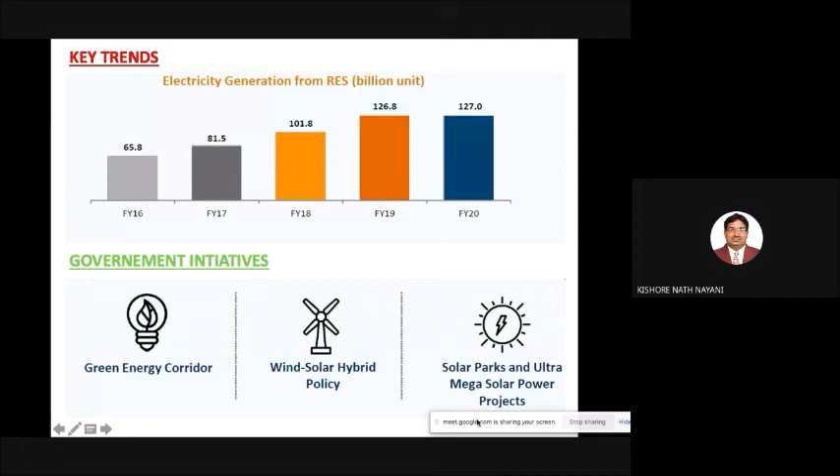So the advantages of these policies are that we are increasingly going to increase renewable energy usage. The Prime Minister is also giving a lot of thrust in order to use renewable energy sources in solar, wind, etc. These are some of the policies introduced by the Indian government.

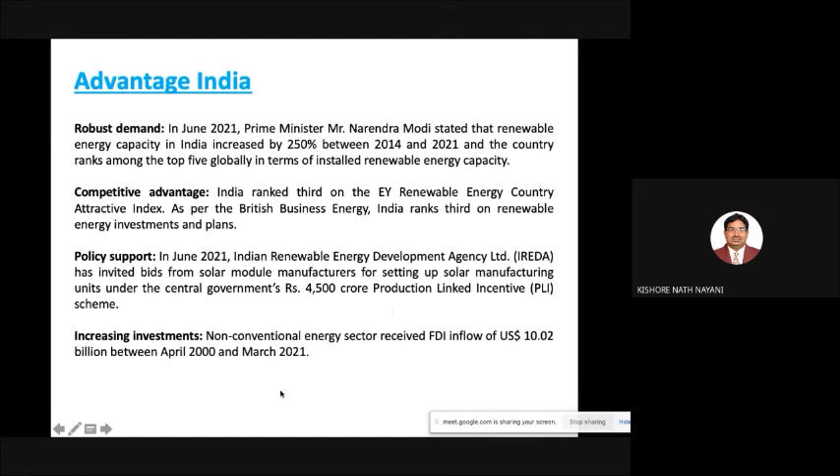Thank you very much for giving me an opportunity to share some of the work which we have done in renewable energy sources. Participants, any discussion, we can continue the discussions.